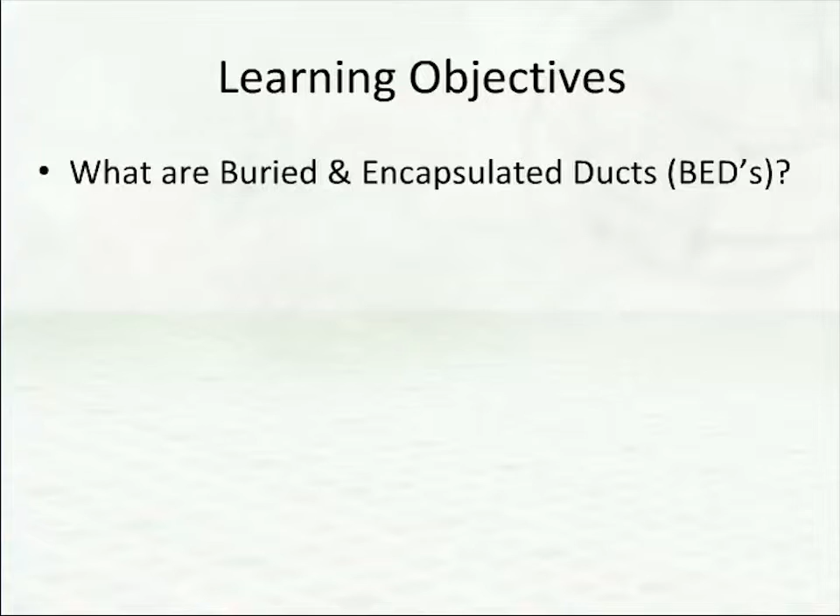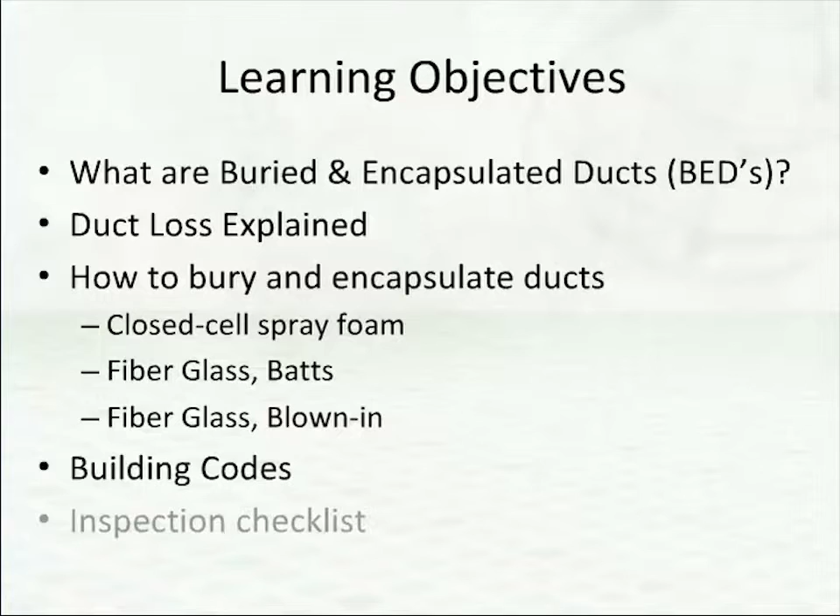In this short 5-minute lesson, we'll explain what buried and encapsulated ducts are. We'll touch on duct thermal losses and how to mitigate them. Then we'll examine ways to bury and encapsulate ducts using closed-cell spray foam, fiberglass batts, and blown-in fiberglass. Finally, we'll look at BEDs through the lens of the Building and Energy Code and end with an inspector's checklist.

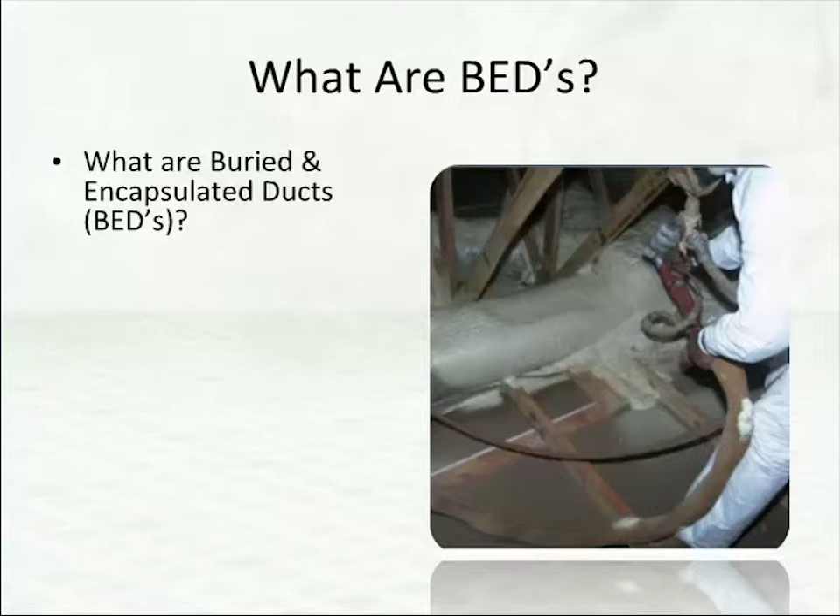Buried and/or encapsulated ducts, also known as BEDs, are an energy efficiency strategy to reduce ductwork thermal losses in unconditioned attics. BEDs are simply ducts covered in loose-fill insulation and/or encapsulated in closed-cell polyurethane spray foam insulation. As building codes raise requirements for duct sealing and insulation, and as the building industry has struggled to address ductwork thermal losses in new and existing homes, BEDs offer a flexible approach to reach energy efficiency goals.

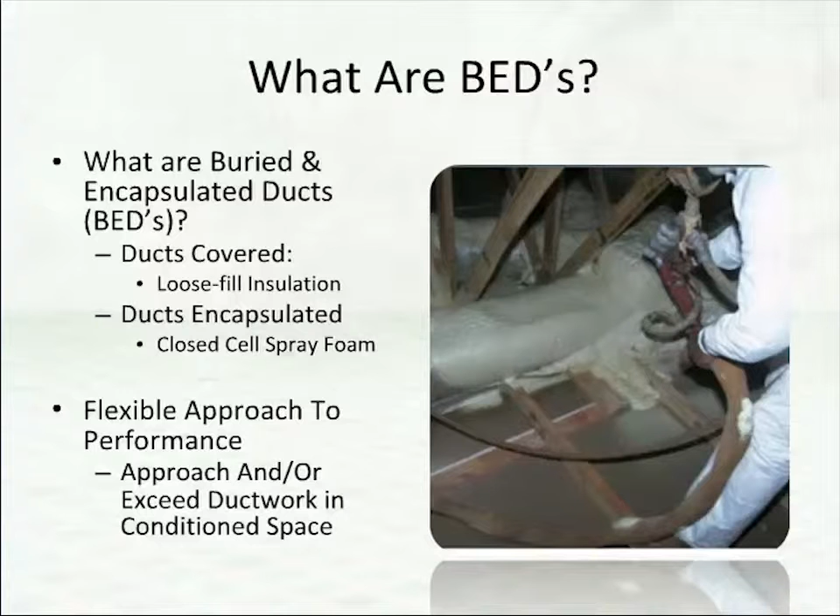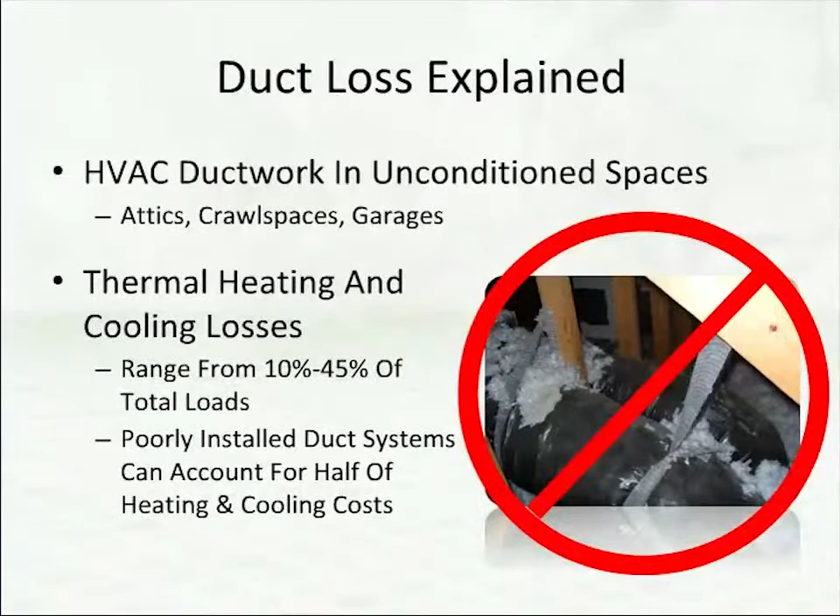While ductwork installed within the thermal envelope is one solution, BEDs can approach or even exceed the performance of ductwork placed within the thermal envelope. Studies by the Department of Energy's Building America program have determined that ductwork installed in unconditioned spaces, such as attics, crawl spaces, and garages, can contribute significantly to the overall heating and cooling costs of residential buildings. Estimated duct thermal losses for single-family residential buildings with ductwork installed in unconditioned spaces range from 10% to 45% of a building's total cooling and heating loads.

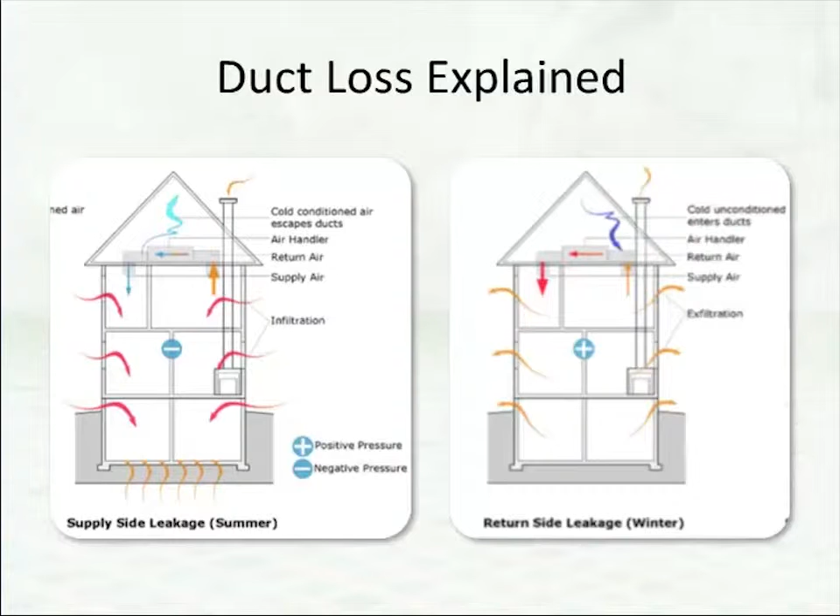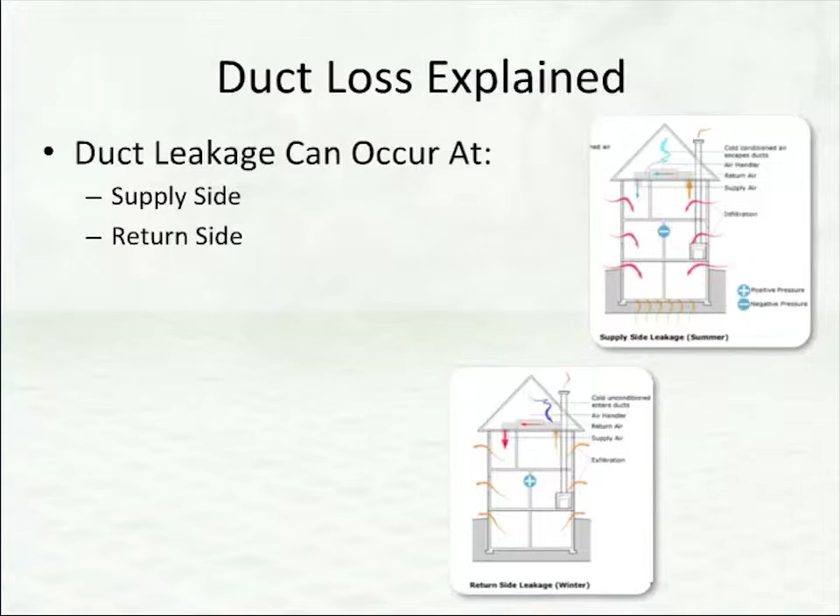Forced air heating and cooling systems distribute air via an air handler and a duct system. The air handler is designed to remove air from the house, heat or cool it, and supply it back to each room. Duct leakage can occur on either the supply side or the return side of the air handler, as well as in the air handler itself.

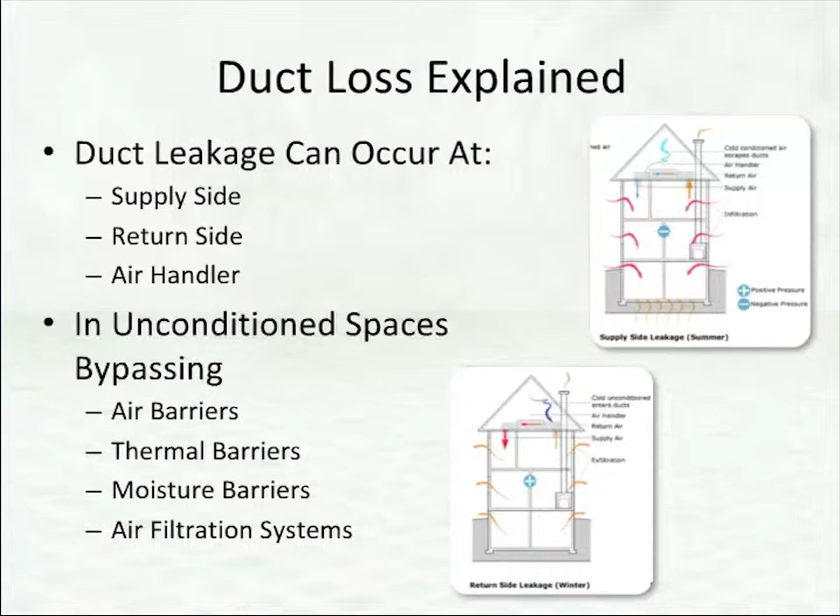Both supply and return leaks cause the air to move in unplanned, unpredictable ways, usually through the unconditioned spaces and often bypassing air, thermal, and moisture barriers, as well as air filtration systems. Those leaks can account for almost half of the total heating and cooling costs of some residential buildings.

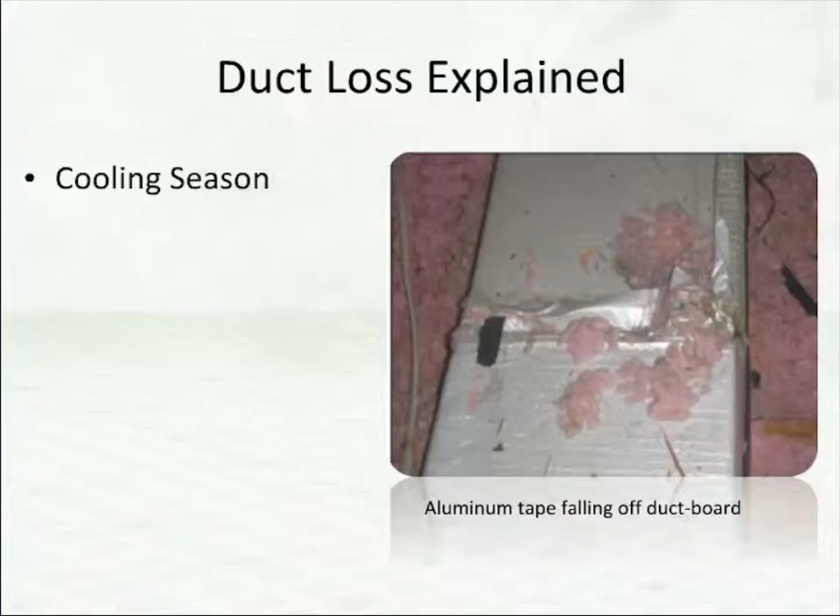Energy losses from duct leakage to the outside, which can be as high as 20%, are exacerbated by large temperature differentials between the conditioned air inside the duct and the air in the unconditioned attic. During the cooling season, 55-degree Fahrenheit conditioned supply air can be separated from hot 120-degree Fahrenheit ambient attic air by duct insulation as low as R4.2. During the heating season, this temperature differential can be even higher, with 110-degree Fahrenheit supply air passing through cold attics with 20-degree Fahrenheit ambient temperatures.

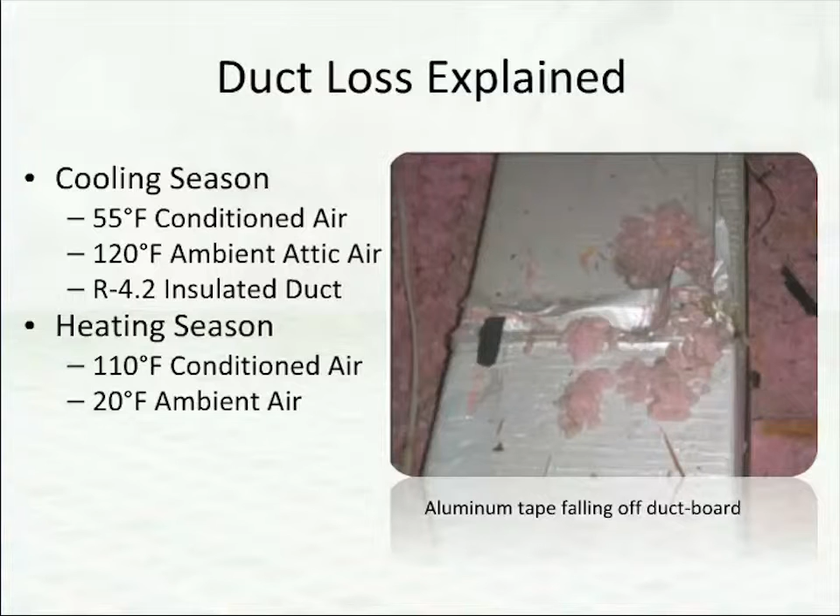There are 3 primary methods of reducing ductwork thermal losses in unconditioned spaces. They each have various cost, performance, safety, and practical trade-offs, but properly implemented, each can greatly improve heating and cooling system efficiencies. First, properly installed ductwork, well sealed and insulated to current IECC code, can drive ductwork thermal losses down to around 10%, but further reduction requires more advanced techniques.

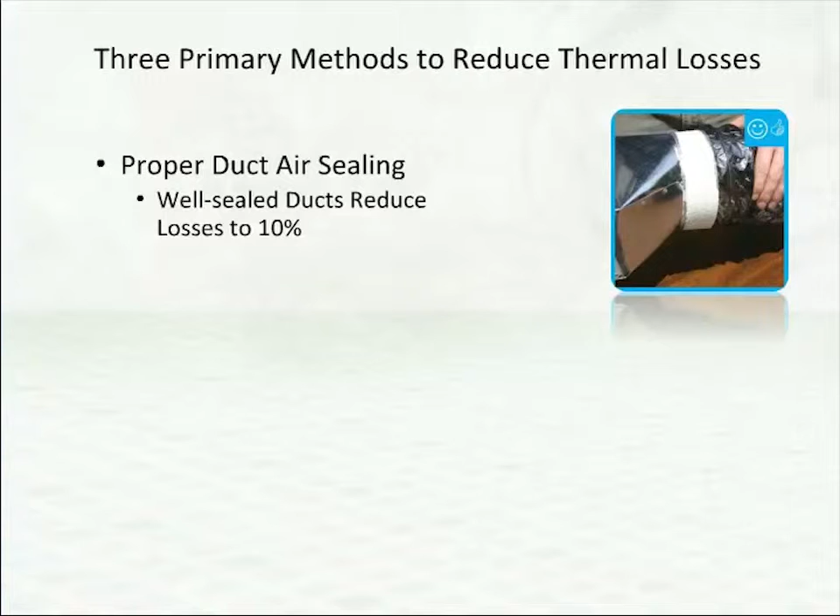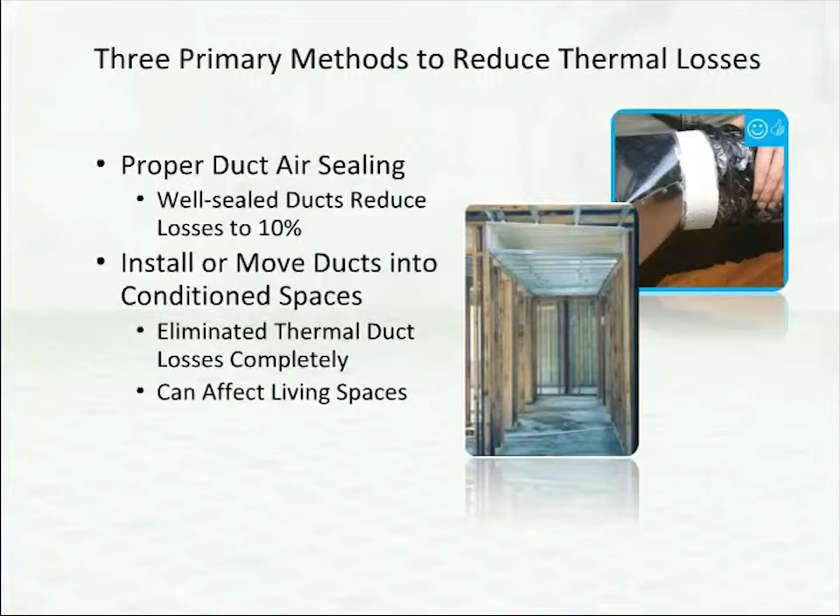As a second approach, by installing or moving ducts within the thermal envelope, duct thermal losses can be eliminated entirely. However, depending on the method employed, living space may be affected. Finally, by burying and/or encapsulating ductwork in attics, the BEDs approach, ductwork thermal losses can be reduced to around 3% or less. This course is focused on BEDs, but for background, here's a slide that shows 4 ways creative home designers are beginning to bring HVAC ducting into a building's conditioned space.

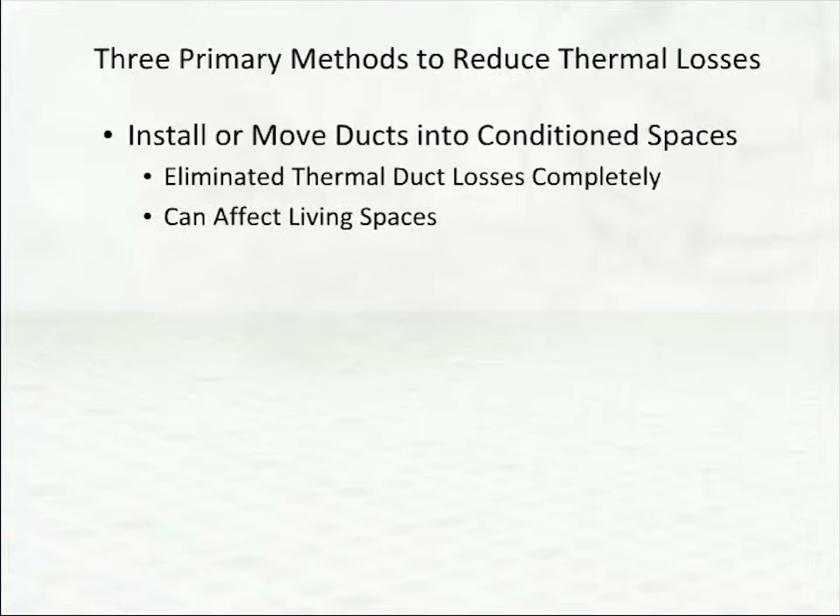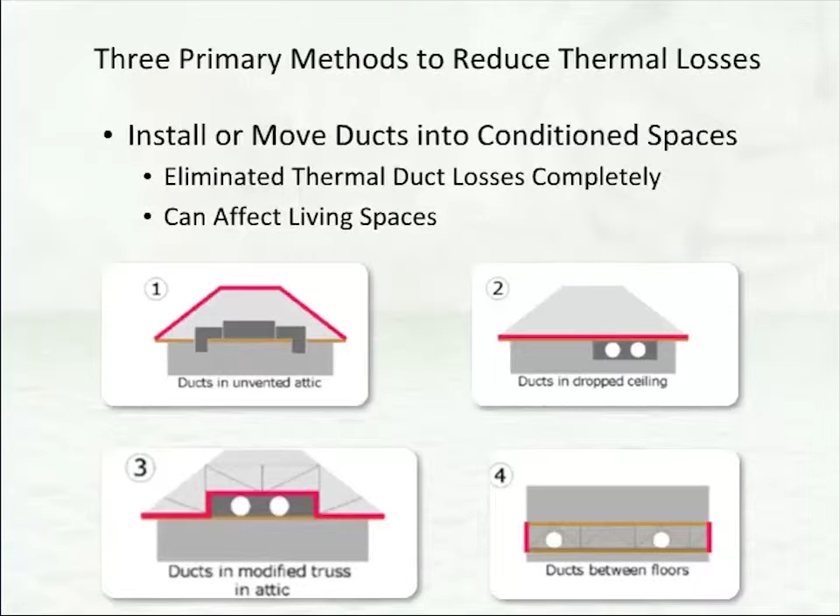Figure 1 shows ducts in an insulated, unvented attic. Figure 2 illustrates ducts installed in a dropped ceiling. Figure 3 shows ducts in a space created by a modified truss. And Figure 4 shows ducts running between floors. In all 4 cases, ducts are inside the building's thermal envelope, so even though there is a slight leakage, the heat or cooling remains in the conditioned space.

Buried and encapsulated ducts will reduce the heating and cooling loads of the building, and as a result, the space conditioning systems may be downsized in some cases. In new construction, equipment downsizing will reduce the cost of implementing a BEDs strategy. In retrofit scenarios, the energy savings and costs of a BEDs strategy will depend on whether a new, downsized space conditioning system is installed.

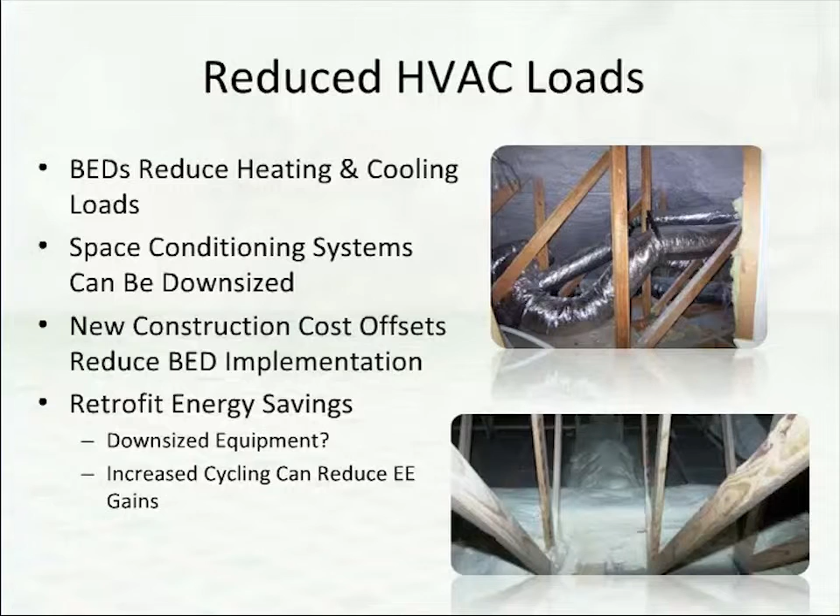If the space conditioning system is not downsized, the reduction in load associated with beds may increase cycling in the space conditioning equipment, reducing the efficiency of the equipment and energy savings. On the other hand, simultaneous replacement of space conditioning equipment and implementation of a bed's strategy may be a way to reduce installation costs and maximize energy savings.

There are 3 possible duct insulation strategies: buried ducts, encapsulated ducts with closed cell spray foam, and the combination of buried and encapsulated ducts.

The best solution depends on the climate, age of the house, and the configuration of the HVAC system and attic. Ducts that are only encapsulated without burial are not recommended for new construction, simply because additional burial requires only minor increases in planning and costs over encapsulation alone, yet yields significantly higher performance with minimal additional effort.

Buried ducts without encapsulation should not be installed in moist or marine climates because there is a risk of condensation on the surface of the ductwork.

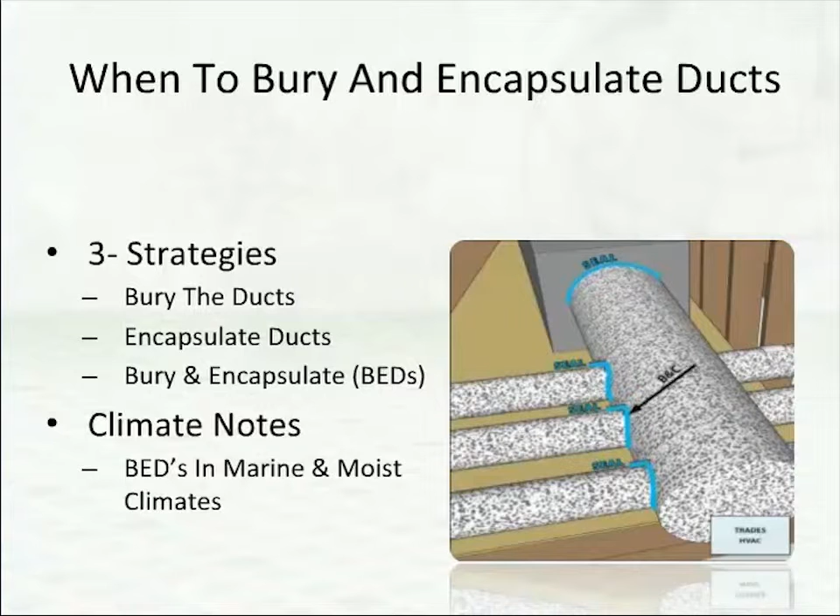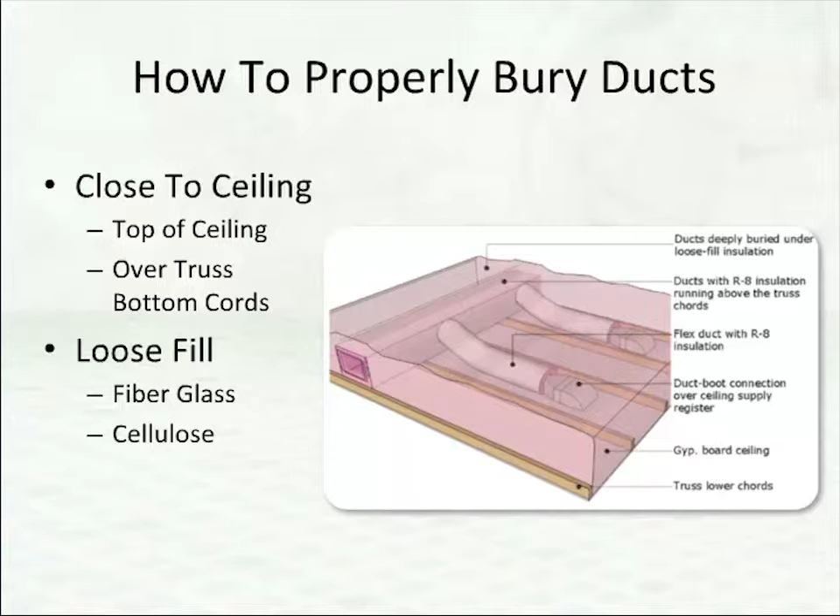Buried ducts involve placing ductwork as close to the ceiling as practical, either on top of the gypsum board ceiling or over the truss bottom cords, and then burying the ductwork beneath loose-fill insulation. Any loose-fill insulation, such as fiberglass or cellulose, can be used. When more loose-fill insulation is used to boost the duct R value, there is an added benefit of increasing the ceiling assembly R value as well.

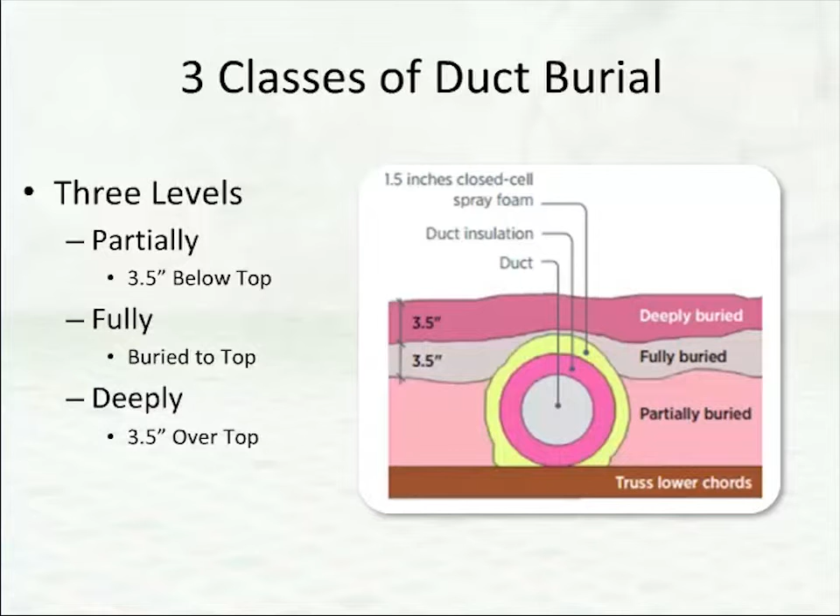Buried ducts are categorized into 3 classes based on the distance from the top of the duct to the top of the loose-fill insulation. The classes are partially buried, fully buried, and deeply buried. Partially buried ducts are buried to 3.5 inches below the top of the duct. Fully buried ducts are buried to the top of the duct, and deeply buried ducts are buried with 3.5 inches of loose-fill insulation over the top of the ductwork.

Ducts are encapsulated by spraying the ductwork with closed-cell polyurethane spray foam to boost the R value of the duct insulation and reduce air leakage. Although closed-cell spray foam may be applied directly to the exterior of uninsulated ductwork, insulating ductwork with fiberglass duct wrap prior to encapsulation is a way to increase the duct R value for less cost.

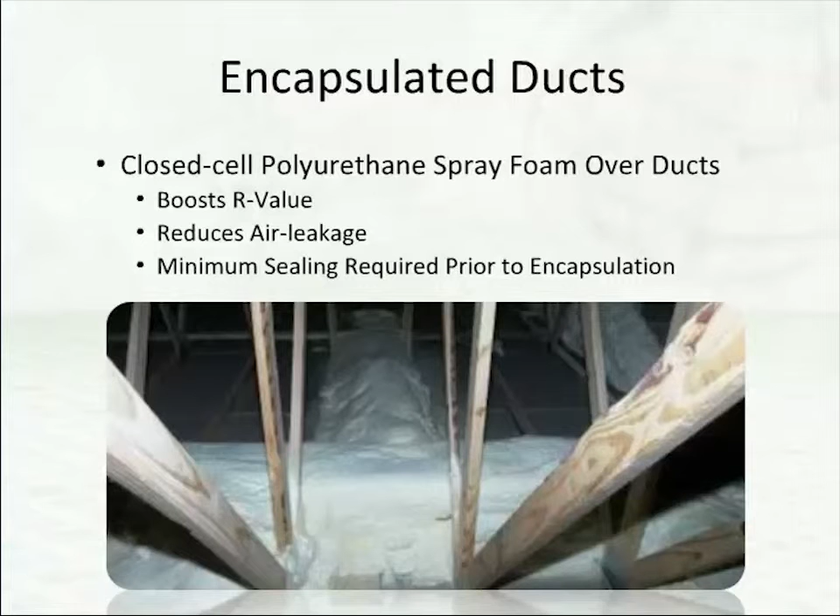Unlike simple buried ducts, where duct sealing prior to burial is a must, encapsulated ducts do not require rigorous air sealing. Ducts should be sealed to reasonable tightness, and then closed-cell spray foam will act as an additional air barrier. In order to be code compliant, the closed-cell spray foam must be approved for exposed attic insulations.

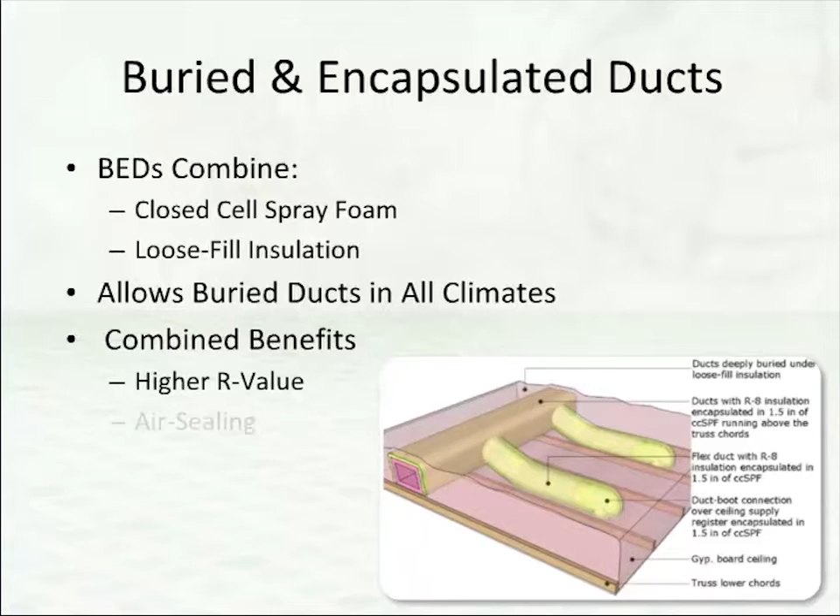In the BED system, ducts are first encapsulated with closed-cell spray foam insulation and then buried under loose-fill insulation. Although initially conceived as a way to apply the buried duct concept to humid climates, where condensation could occur on the outer surface of buried ducts, BEDs can also be used as a high-performance duct insulation strategy in all climates. BEDs have even higher R values than buried ducts and include the air sealing benefits of encapsulated ducts.

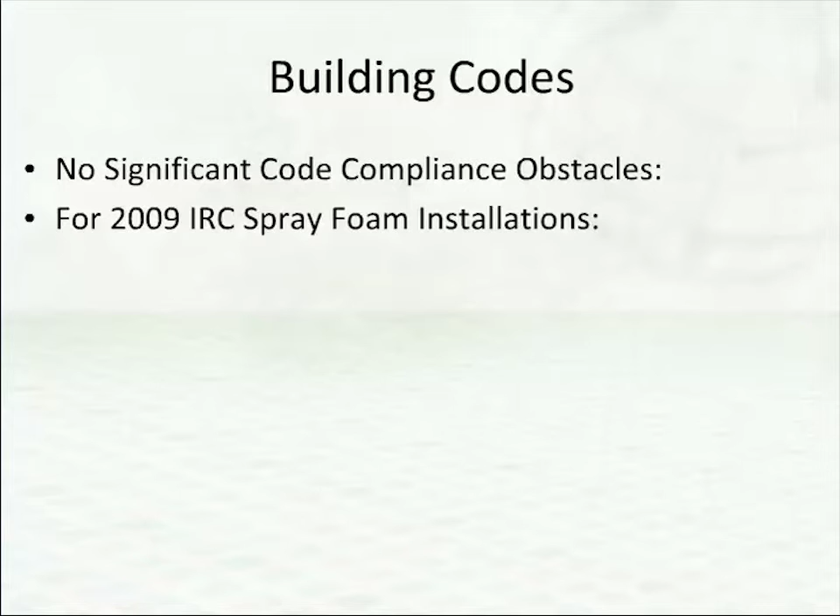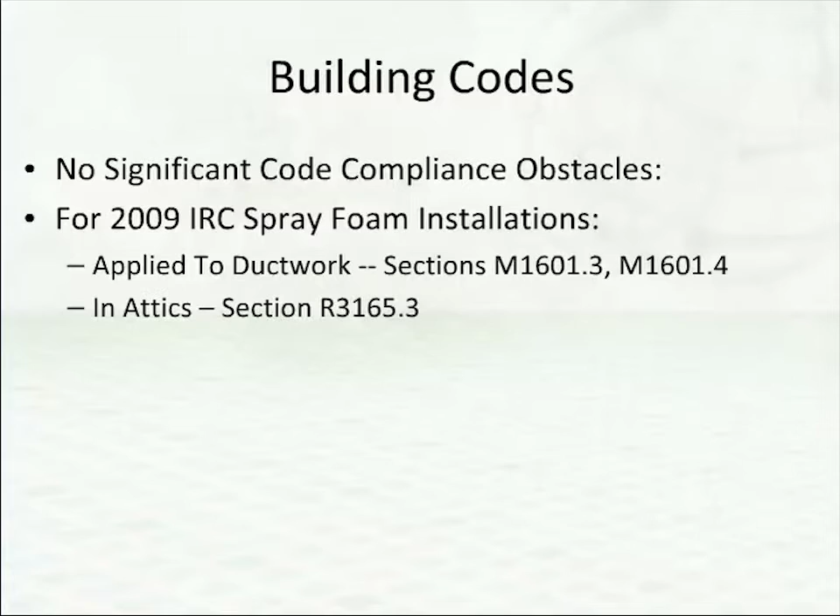While there are no significant obstacles to ensuring that buried duct installations are code compliant, installations involving closed-cell spray foam must be carefully considered. In general, the 2009 IRC requires that spray foam insulation applied to the exterior of ductwork, covered in sections M1601.3 and M1601.4, and in attics covered in section R316.5.3, meet several requirements. First, the spray foam must have a flame spread index no greater than 25 and a smoke-developed index no greater than 450.

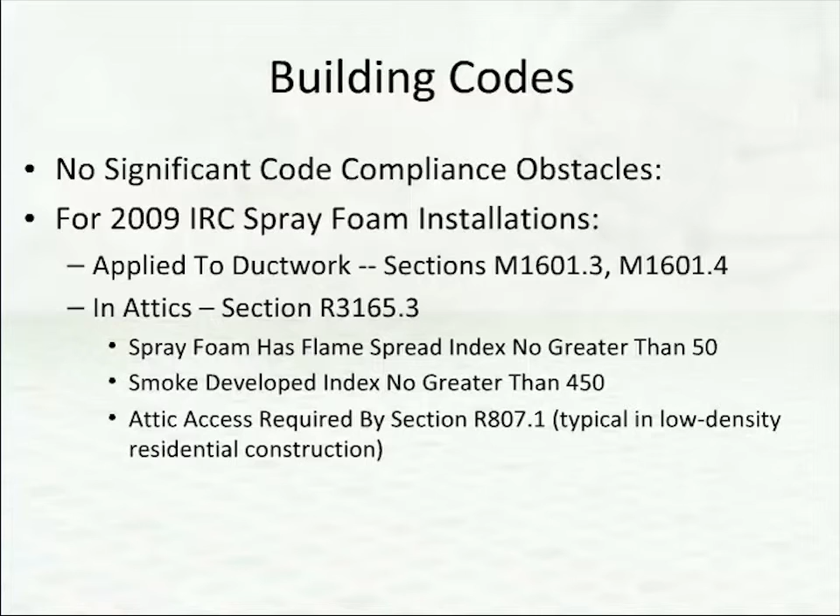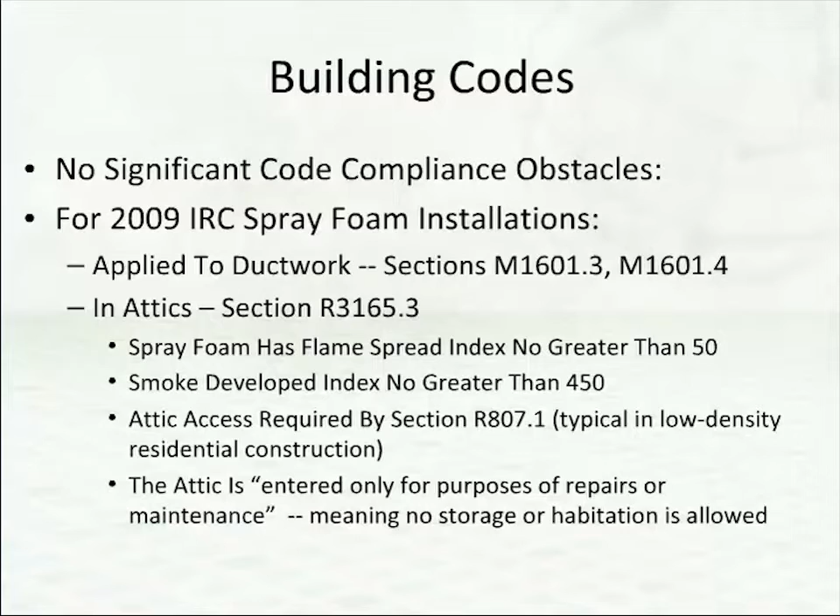Next, attic access is required by section R807.1, which is typically required in low-density residential construction. And finally, the attic is entered only for purposes of repairs or maintenance, meaning no storage or habitation is allowed. In addition, the spray foam must be protected by an ignition barrier, and the spray foam must have a maximum water vapor permeance of 3 perms per inch, which means that open cell spray foam cannot be used.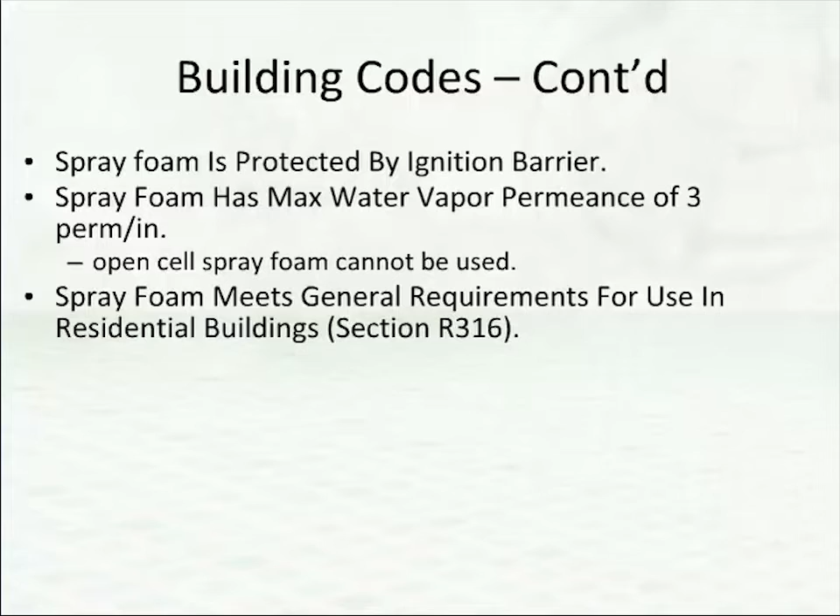Next, the spray foam must meet the general requirements for use in residential buildings under section R316. Lastly, the IRC allows exposed installation of closed-cell spray foam in attics, but the spray foam must be specifically approved for installation without an ignition barrier under section R316.6. In this case, approval is determined on the basis of specific fire-related test procedures.

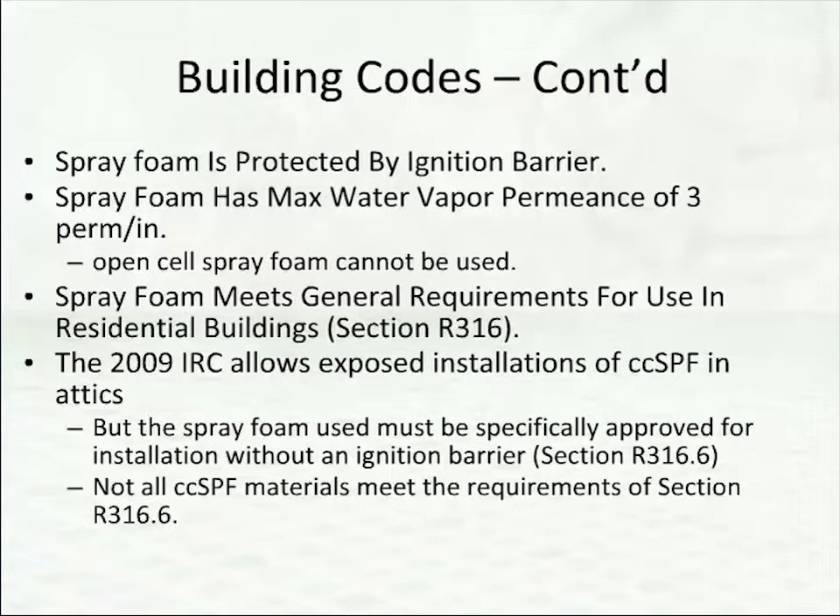Note, not all closed-cell spray foam materials meet the requirements of section R316.6. If the spray foam used is not approved for exposed attic installations, encapsulated ducts must also be buried in loose-fill insulation such that the closed-cell spray foam is covered by an ignition barrier.

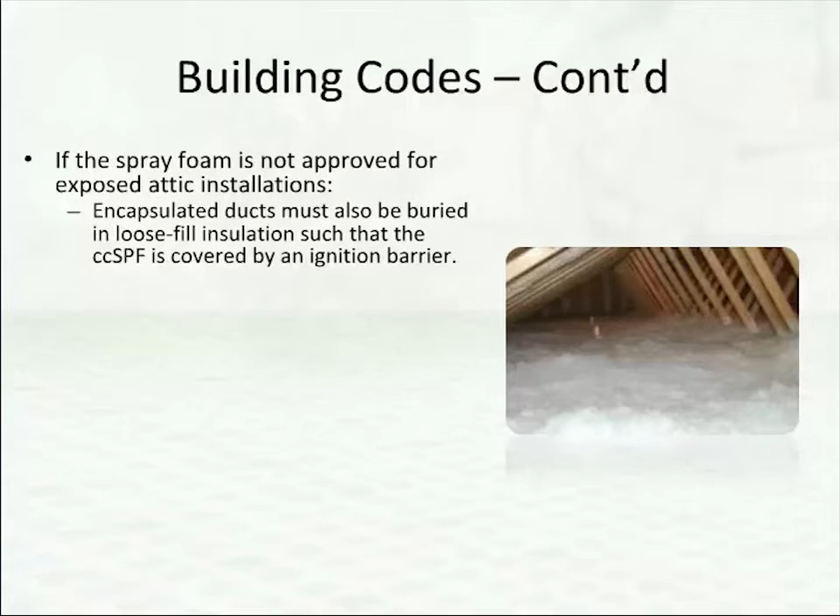For BEDs, 1.5 inches of fiberglass, which is considered mineral fiber insulation under ASTM C764-11, meets the minimum requirements for ignition barriers. BEDs using a closed-cell spray foam material specifically approved under section R316.6 may be buried under cellulose. All other BED installations require 1.5 inches of fiberglass or mineral wool insulation coverage.